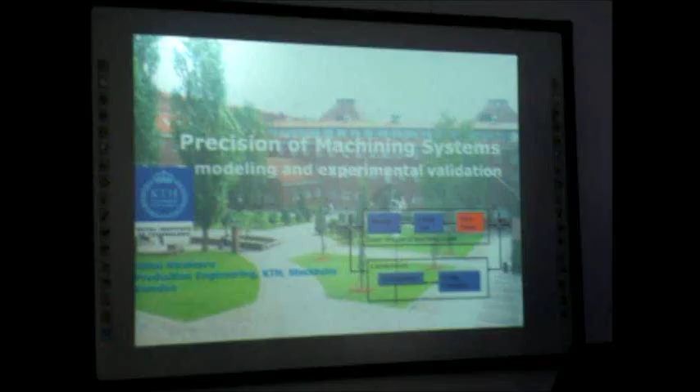Thank you for the invitation, and thank you for being here. I feel more Tunisian now than Swedish. Very nice to be here. Thank you, Samir, for organizing this and keeping me busy, as always.

Last time you said my presentation was more touristic. Now I want to make it more technical. So this is a presentation, not a lecture, on our research in precision machining, and I will present our approach and the concept we developed.

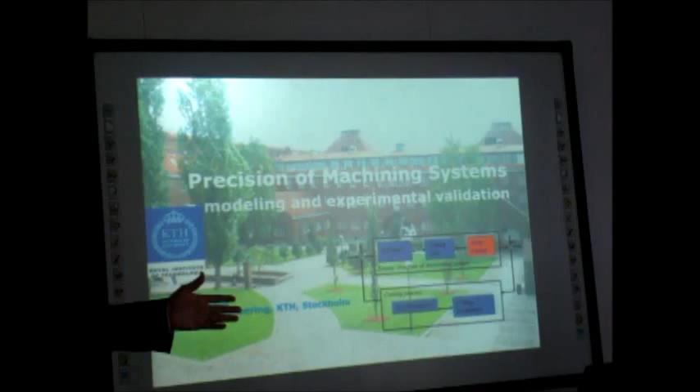So if you read this title, it's about the precision of machining systems. I'll explain what I understand by machining a bit later. The presentation today covers precision capability, elastically linked systems, loaded double ball bar testing of machine tools under loaded conditions, modeling, and finally conclusions about strategies for compensating errors.

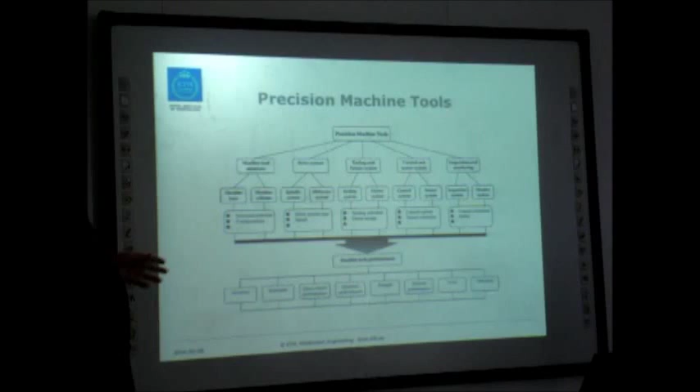First, something everybody is probably familiar with: this type of representation of precision machine tools and their components, elements in the machine tool. There are structural elements and elements connected to the control system, drivers, and so forth. Then we define the performance of a machine tool with respect to performance criteria like kinematics, dynamics, thermal errors, and so forth. This is a quite familiar picture that I think everybody understands.

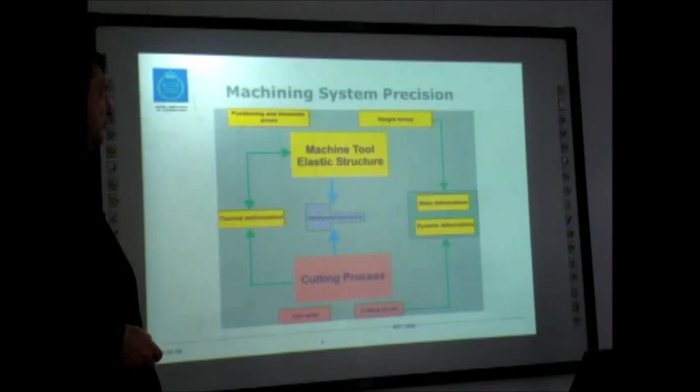The problem here is that this is about the precision machine tool itself, which is more interesting from the manufacturer's point of view. But for users, we are interested in the interaction between the machine tool structure and elements and the machining process. For instance, thermal deformation or thermal deviation can come both from the cutting process and from the machine tool structure, or friction from parts in movement. This is the new aspect that we developed in my group.

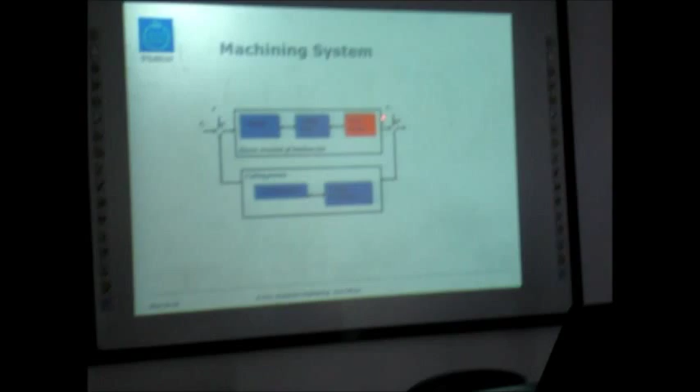So we define a machining system as the interaction between the machine tool structure, the control system, and the cutting process. In this interaction between these two subsystems, we study the precision of the system. As in any mechanical system, the structure is excited by a force, and the output of the structure gets some deviation, static or dynamic vibration, and this is the input to the process. The variation at the output of the machine tool structure generates deviation in cutting conditions, resulting in deviation of cutting force, which can be amplified or damped.

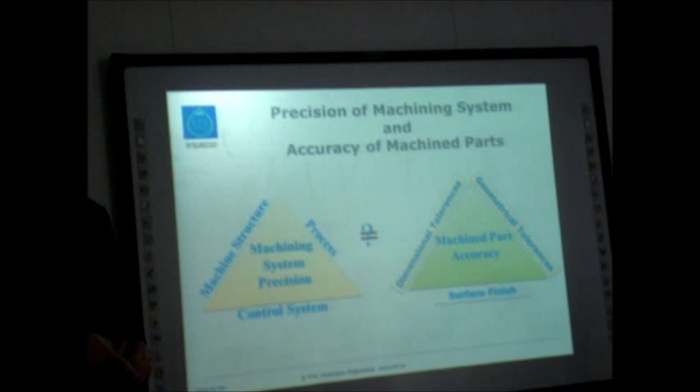Now about the link between precision of machining systems and accuracy: regarding nomenclature, I use the traditional way, so everybody knows there's a difference between precision, which is connected to repeatability, and accuracy. I use the standard definitions. In my opinion, from the point of view of the machine tool or machining system, this precision feature is more important with respect to delivering the same characteristics of the part all the time, while for machined parts, accuracy is better defined from a static point of view.

So in machining system precision, we talk about machine structure and precision of the control system—all of these contribute to system precision. While in machined part accuracy, we have dimensional tolerances, geometrical tolerances, and surface finish. There are, of course, many other parameters that can define a part, but from the point of view of accuracy, we can agree that these are sufficient.

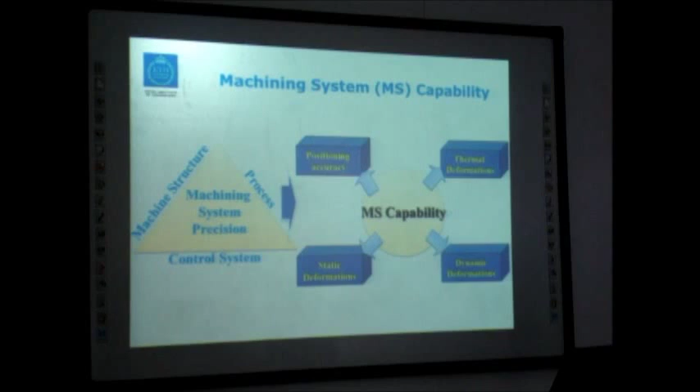Now, machining system is also connected to machining system capability in terms of position, kinematics, accuracy, thermal deformation, dynamic deformation, vibration, and static deformation. These are the main groups of errors or deviations from accuracy that can belong to one group or the other.

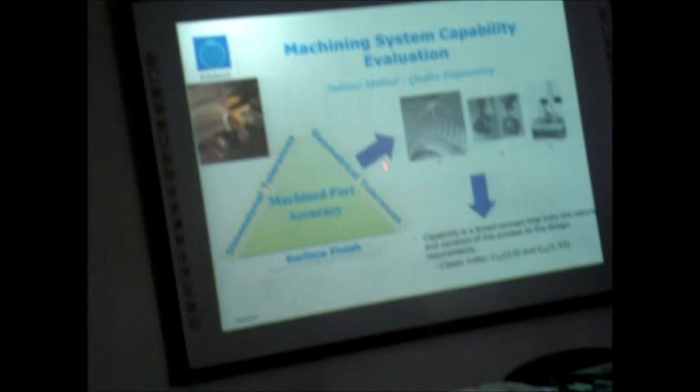There are two methods to define the precision of machining or the machining system. One is an indirect method, belonging to the quality engineering area, where you measure the parts—the output from the system—and from this we define an index, normally called a capability index. So we don't measure anything in the system itself, we measure the output in terms of outcomes. The main limitation, I think, is that this is missing one picture.

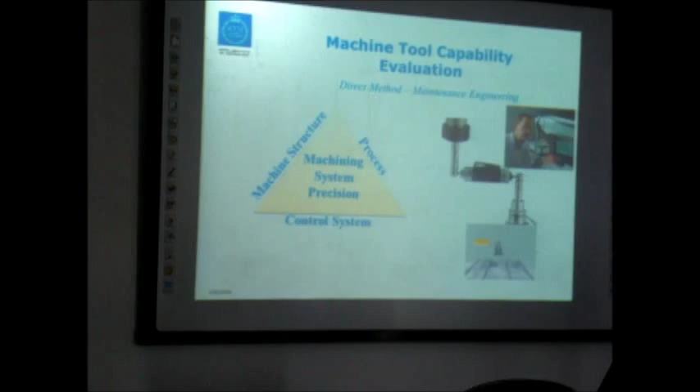Then we go to the direct method, which makes a difference. Here we talk about the machining system because the output depends both on the machine tool and on the process. But current methods for evaluation through direct methods refer only to the machine tool—they look only at the capability of the machine tool outside of the machining process.

And there is some equipment used today for controlling precision. One of these is the double ball bar, and another is the laser interferometer. I can show you the double ball bar in case you don't know what it is—I can do that.

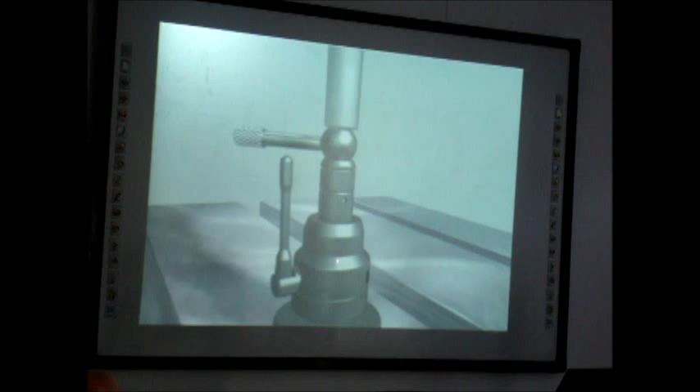So this is a double ball bar instrument. This first part is to calibrate the machine tool table and to calibrate the spindle position, and then you fix the fixture on the table.

So this is calibration. Then you bring this double ball bar - it's called that because it's a bar with two balls. This is a quite normal procedure, and then you execute a rotation. These bars can have different lengths, and you produce a circular trajectory and measure the deviation from a circle.

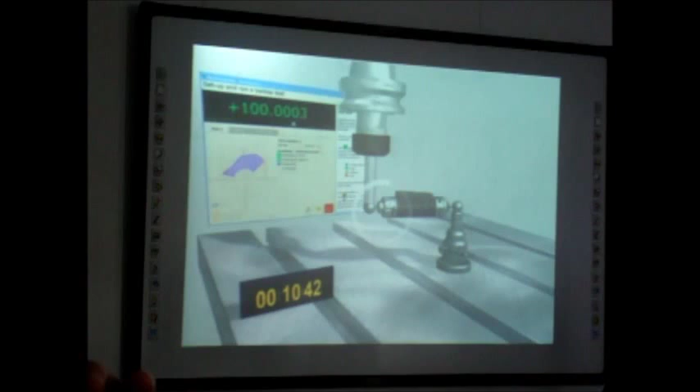And you make a counterclockwise rotation to make a rotation circle. In some machines you have both table and spindle to produce this rotation. In other machines, as in this one, only the spindle - the table is fixed - to produce this type.

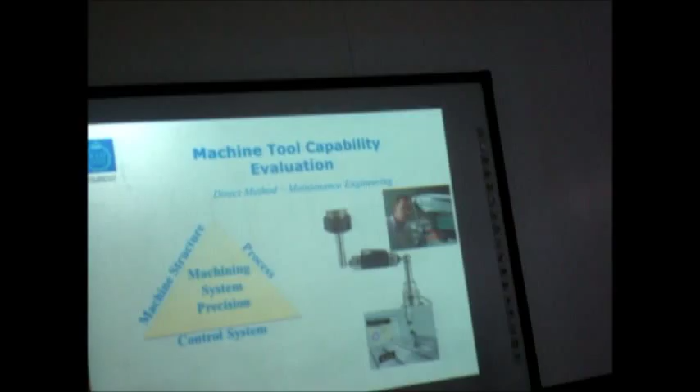Other method which is more accurate is by laser interferometry, so triangulation, but these are not so popular in industry.

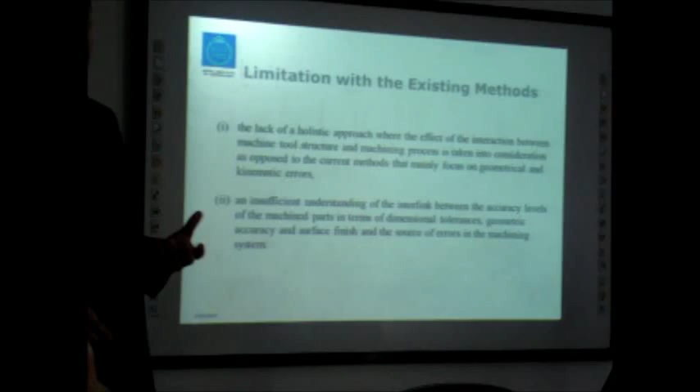Now there are two limitations of these methods. One is the lack of a holistic approach - so the connection between machine tool, machining process, and the measurement system. And the other, the most significant limitation, is that there is no connection between the part that we produce and what is the source of errors.

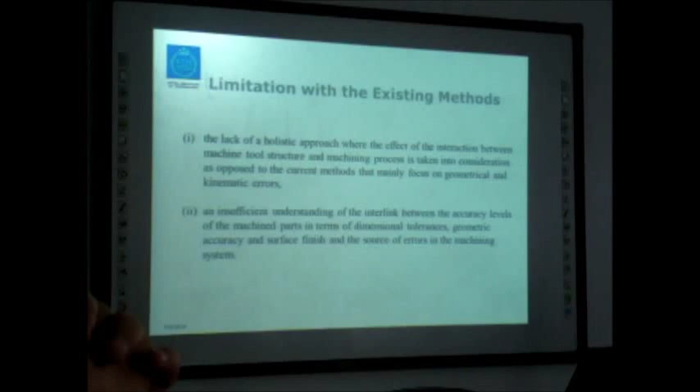So you measure a part with this indirect method. We know that there is some deviation from the design specification, but we don't know what in the machine tool is the source of error. So for this, we have to go in deeper. This deviation can come either from the machine tool or from the process, so it's difficult to discriminate between the two. This is the major limitation.

So therefore, we developed a new method. First, to introduce it, we developed this concept which is called the elastically linked system. Normally, a machine tool in off operation is in a state of open loop - you have an open force from the tool through columns back to the workpiece.

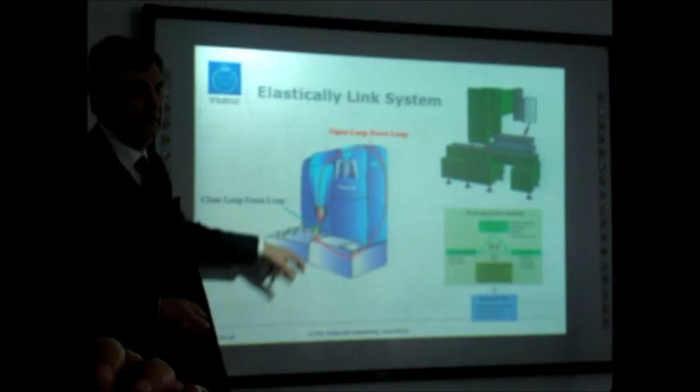Now when we start machining, then we close this loop through the tool. So we have two loops: an open loop and a closed loop. Here is the model that we developed - you have a force loop through the elements of the machine, and another loop that closes this energy loop. This is the concept of the elastically linked system.

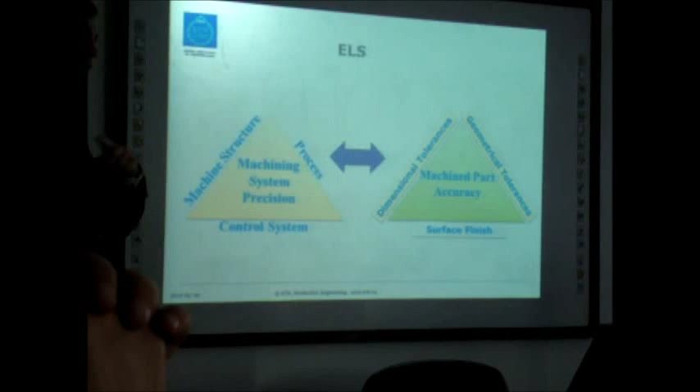What this means is that we can simulate the effect of machining - at least at this stage, static forces and kinematic effects - by changing the load between the spindle and the machine tool table. Based on this concept, we developed the so-called loaded double ball bar. By this concept and method, we can link directly the precision of the system to machined part accuracy. We can now evaluate, from a certain path of the tool in the workspace of the machine, what will be the machining error under the assumption that we consider some forces connected to a cutting parameter.

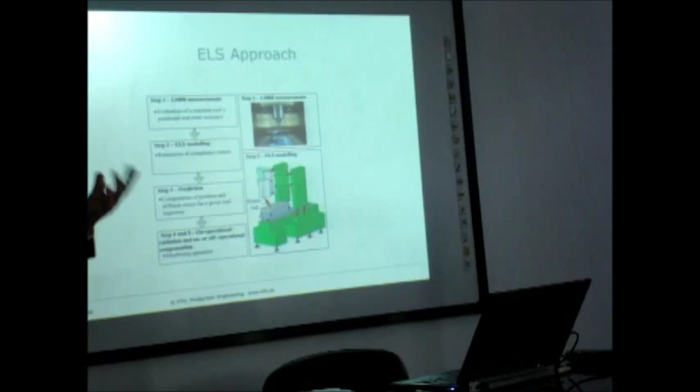So this elastic link approach consists of five steps. The first step is an off-line operation - we are loading the spindle nose and table with different loads. The instrument, which I'll show a bit later, is similar to the double ball bar you have seen before, but we can apply a load. This load can be varied between 0 and approximately 800 to 960 Newton.

So in the first step, we are loading the double ball bar - spindle and table - and we make the same circular trajectory that you have seen before. What we are getting is not the error, but the deformation in the system at that time. So with the double ball bar, we get the error in kinematics and position, but here we get effects both from the deformation in the machining system and from kinematics.

So by connecting this closed loop, we find the deformation in the direction of the loading for different angles.

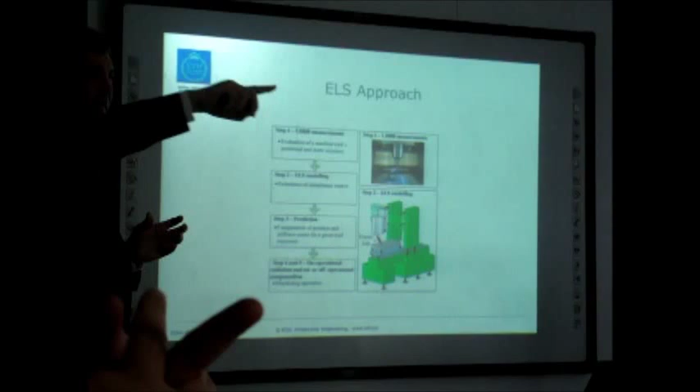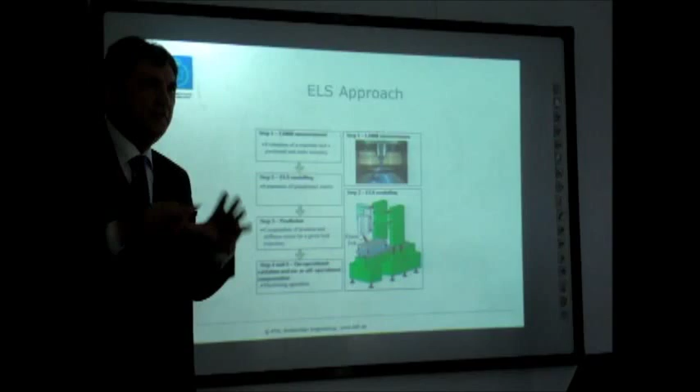If we extract from this some direction of forces and deviation, we can find the deviation with respect to a certain coordinate system. Then we can populate the whole workspace with values of stiffness or deformation. So at any point in space we can calculate the stiffness, know the stiffness, and calculate the deformation and forces at any point. Then, if you have a workpiece of a certain form, we generate a trajectory in this space and find out what are the deviations on the workpiece.

So the first method, this indirect method that is used normally today for modeling, is called bottom-up. This means for finding the distribution of error, we start from each individual connection between two elements in relative motion, which can be rotational or translational. You make a model of how the error between these two components will be, based on a certain coordinate. The method is called the homogeneous matrix method - you probably know it. You make a matrix of all these errors in translation or rotation, and build up the whole machine. This is called bottom-up because overall you get the budgeting of the error, the total error that can be produced.

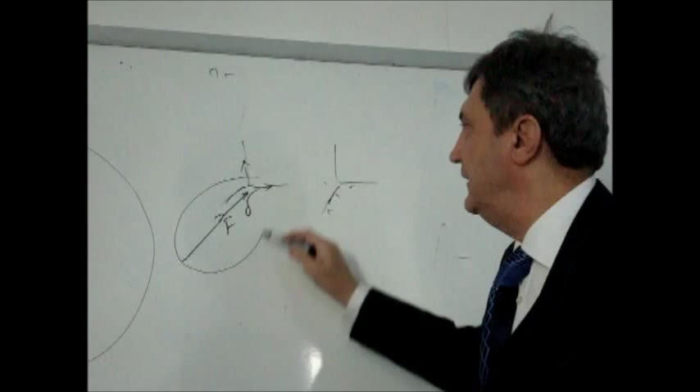But this is a prediction, because it's based on assumption models. What we are doing here is top-down. We know exactly the deviation in the direction of the force. For this, we are projecting into different coordinate systems, and we find the deviation in different axes. So from this, at this point, we know exactly what the deviation is. We will see soon what the limitations are.

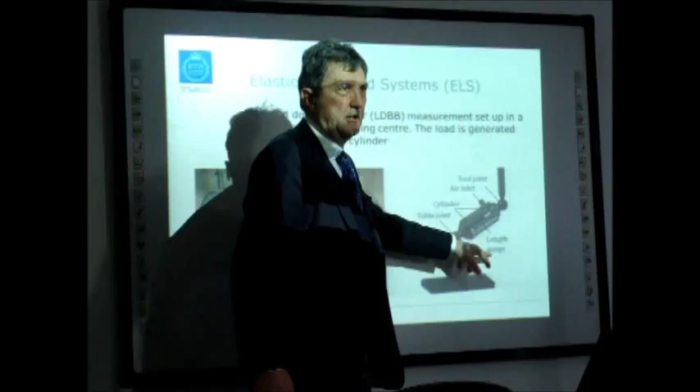So we are using here a multi-body component to calculate and evaluate, at any point in space, the deformation or alternatively the stiffness. So this is the system: a loaded double ball bar, very similar to the conventional double ball bar, but containing an air cylinder. We measure displacement with the length gauge, and we calculate the forces that we apply.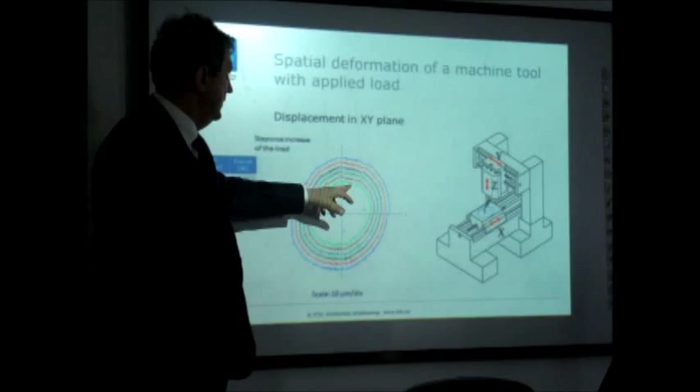So you have a table joint and a tool joint. We load this with different forces, and, just as in the conventional method, we generate some trajectory. It can be in the XY plane or any plane that the machine tool permits. So for different forces we get such trajectories - each curve here represents a deformation. It's not only static deformation, but also includes kinematics and position, because you are making a movement in space. And not only this, we can also calculate from this curve even the nonlinearity in the system.

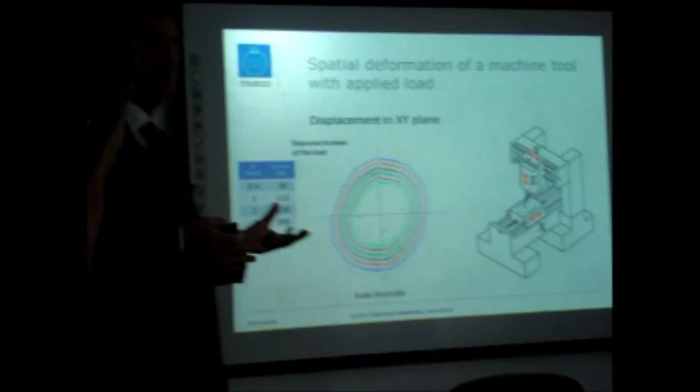This includes both kinematics and static effects - we cannot at this time separate what is coming from static versus kinematics. From the point of view of users, there are two parts in this field: one is the user who is interested in producing an accurate part, the other is maintenance engineering, which wants to find out how to improve this. I can tell you later about the limitations.

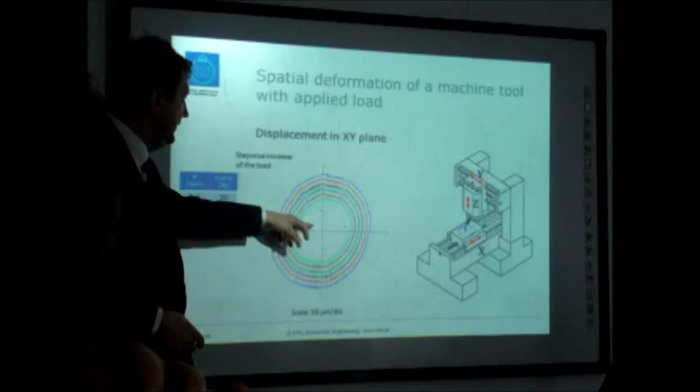So here's the displacement XY plane for different loads, and this is the static stiffness calculated from this curve. We can make this type of experiment in any plane. Now, from this we take a direction, so we know exactly what the force is and what the deformation is.

So if we take the forces in some direction, from the point of view of users, we can now configure - if we know exactly this part - what's interesting for the user is the relative displacement between tool and workpiece. If we know this deviation, we can model the spindle with, for instance, 6 degrees of freedom. We can calculate from this system, we can calculate this one. So we don't need more in order to calculate the deviation here.

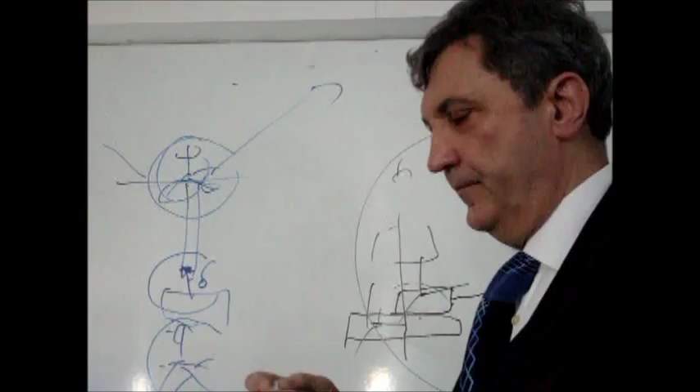But from the point of view of maintenance, we want to distribute this error further in the system. So we developed also a kinematic model for this. We can calculate - here is the direction of this double ball bar, the force and corresponding deviation. Now we can calculate by extracting the forces in different planes. We can also distribute the error to the joints, for instance columns, and go further depending on the system.

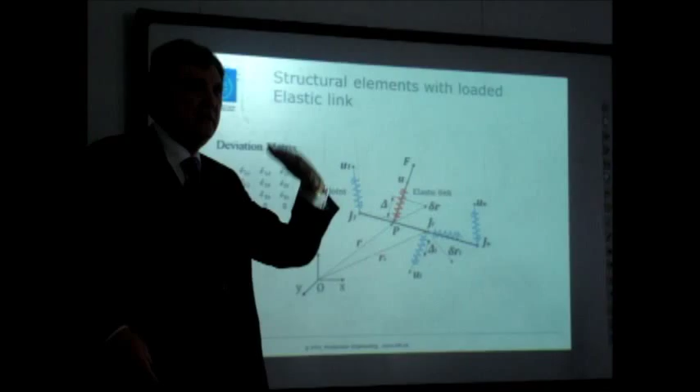The disadvantage of top-down is that we know exactly what happened, but we have to use variational calculus or similar to distribute the error. So the longer we go in the system, the larger the error. But from the user's point of view, it's enough to know this deviation to make a trajectory in the model and calculate resulting forces. So we calculate such a deviation matrix for all these joints, and the better the model, the better our prediction.

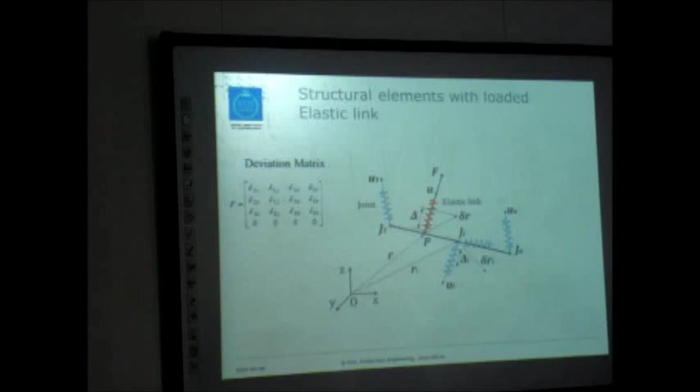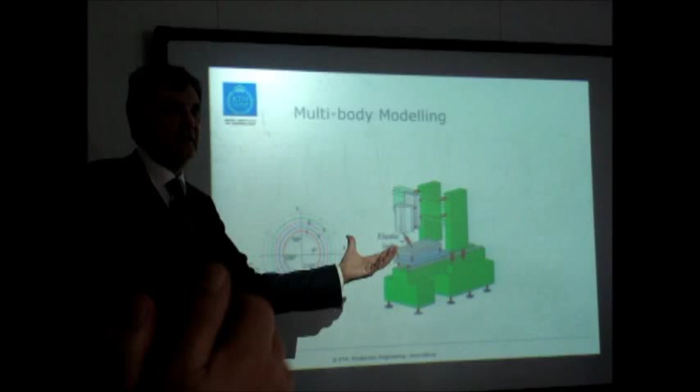So this is the predicted result in a certain plane. For instance, we want to make a circular trajectory, and this is the result for calculation of different forces. So this will be the error or deviation on the workpiece. Now we can link directly the machining system precision with this deviation that we are predicting on the workpiece.

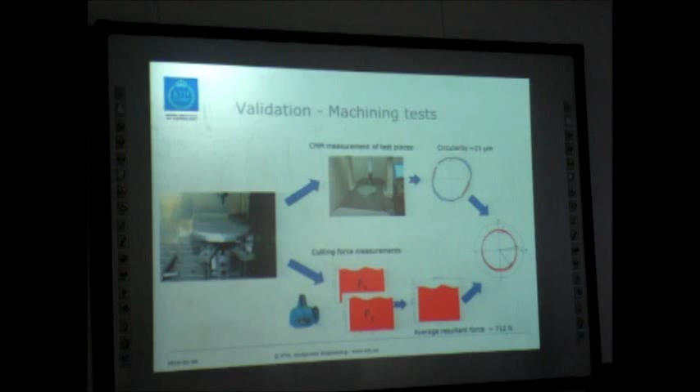So to validate this method, we make some measurements. We place this LDBB in 7 positions, and we make a circular trajectory, and we calculate the corresponding deviation. Then we use a coordinate measuring machine to measure this deviation and compare to the result that we had. So this was the circular piece that we machined. We measured the accuracy with a coordinate machine, and we compare it to the one produced in the model.

And we found the force error in calculation force is under 10%. Now this must also be considered with caution, because the force measurement itself has a quite big error range. So normally with existing commercial systems like the one we are using, you cannot measure repeatedly with accuracy better than 15%. So this 10% must be understood in the right frame.

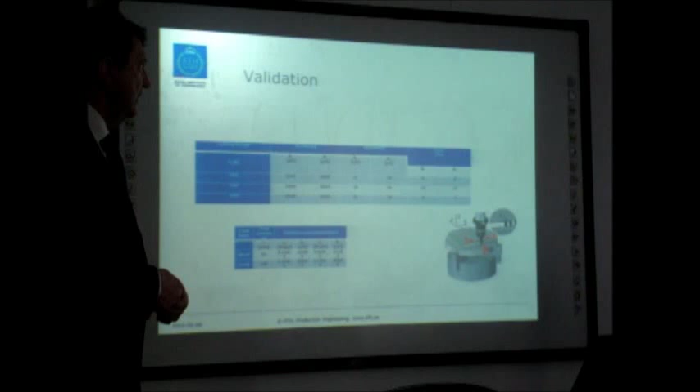But anyhow, the accuracy that we measure, comparing with what we get from the model, the error is very small, so this is also under 10%. So the next step is that we compare these two, model and experiment, and we make a correction in the algorithm and in the model.

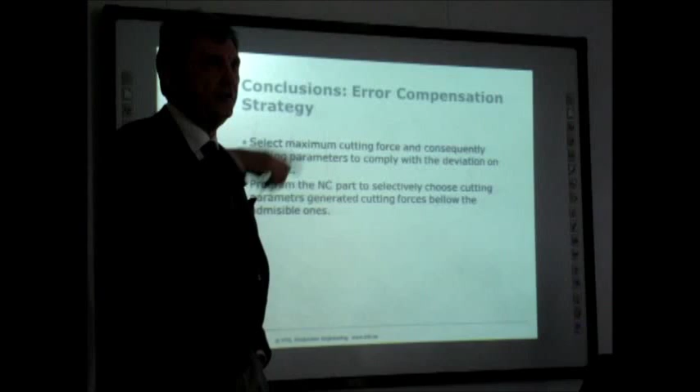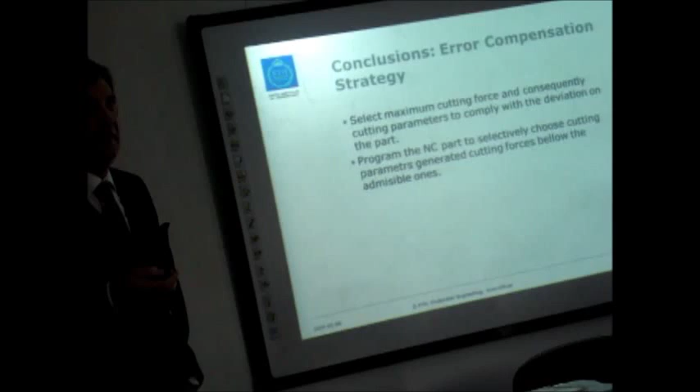Now there are two direct applications of this concept. So now we know exactly the forces, we know force, we know cutting parameters, we know exactly what will be the deviation on the workpiece. Based on this, we can compensate for errors either by reducing the cutting force under the minimum force producing this deviation, or by making a more dynamic strategy by changing the program. So you can change the NC program part, we can change the forces and corresponding cutting parameters that correspond to this deviation that we want to compensate.

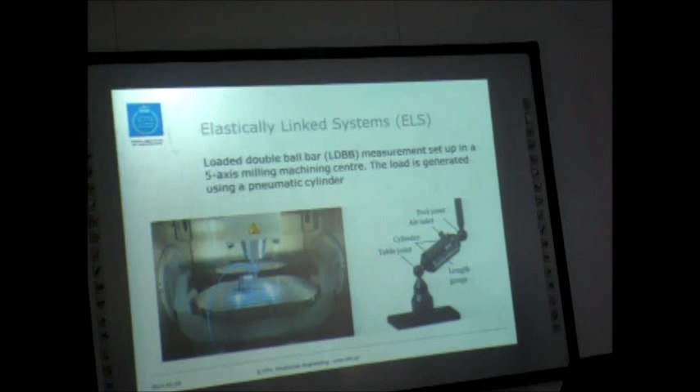We are working in this program. Initially the project was performed together with Scania, but then this device was produced by a company called C.E. Johansson. Probably you know, because it's one of the older companies that developed a lot of instruments. This company was bought by a Swedish company called Hexagon. So now this project is financed by Hexagon, so the next step is to develop...

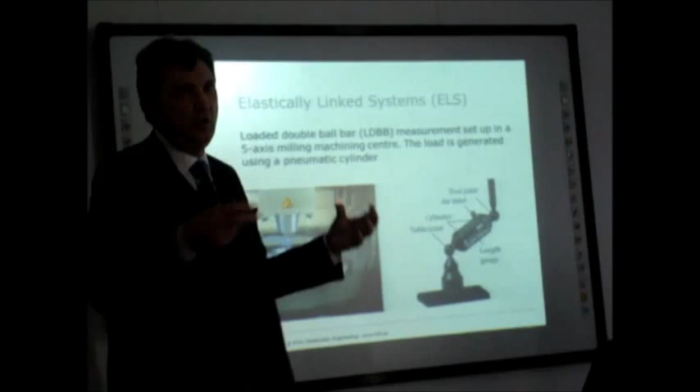What I didn't mention, is that the ball bar is fixed between spindle nose and table. But the most effects, at least from a static point of view, come from the tool and from the workpiece, if you have a quite flexible workpiece. So what we are doing in the model, we are adding to this finite element based multi-body model the tool and the workpiece.

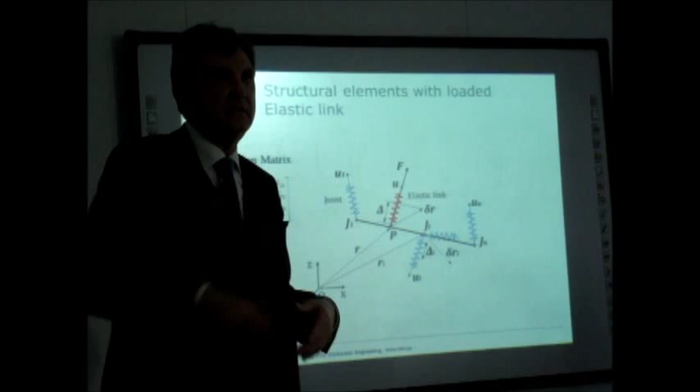So these are included, and also from our experiments we find out that most error comes not from kinematics or position, but comes from tool deformation, or alternatively from the workpiece, also vibrational effects. So as soon as, for instance, you increase the tool length, you start getting vibration, giving deviation much larger than we can get otherwise.

We also saw a quite large effect coming even from tool wear. So it's important to separate these effects coming from the workpiece, from the process, and from the machine. So right now we can link directly the machining system to the outcomes, to the machine part.

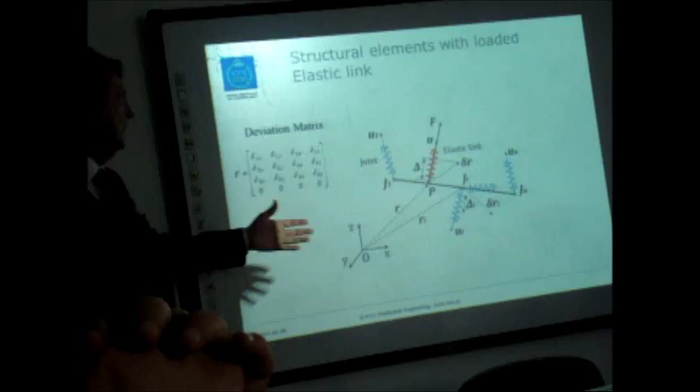Remains to see further if we can better predict the deformation of different components, because here it's still statically difficult to express a deviation in movable parts. So in guides, the most error comes from movable parts, from spindle or from the guide, stable screw drives and guides.

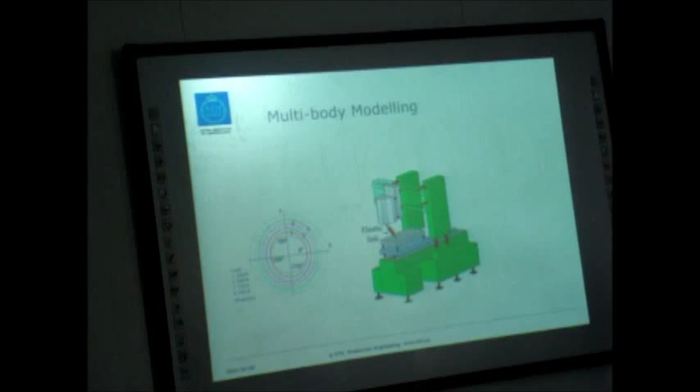I think that is... Does it have to be horizontal, or does the orientation not matter? Now, this is also...

There is a problem when you have a load, because if you want to keep constant, what you want to keep constant is the force in the loaded double ball bar, or the force in the component. If you have a force which is vertical, you have no component here. So the system has a compensation that takes this into account. In fact, you are interested in the projection in the direction, not what we have in the system. So it's compensating, because you have a deformation even in these joints, both in the table and the spindle.

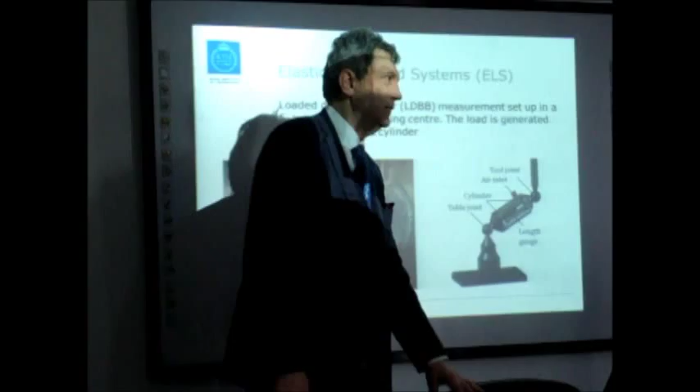What I am now preparing, because the most important part is the stiffness, and deformation and kinematic error also vary with respect to the speed, so now I am preparing a system that permits to rotate the... In fact, also for...

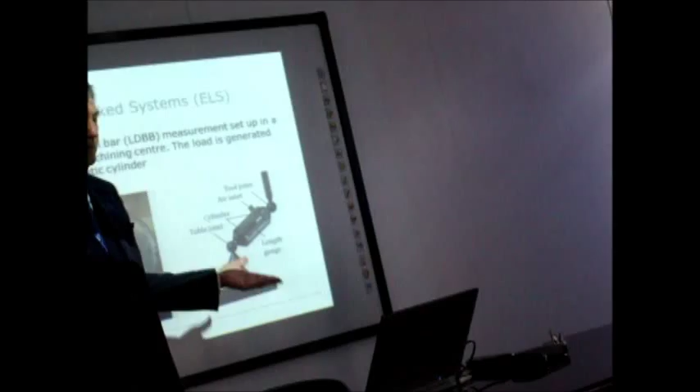And how do you know the horizontal angle, vertical? Unfortunately I don't have a video or record that shows how this rotates, but as with this conventional double ball bar, you can rotate this plane, as the machine tool permits. So if you have a 5-axis machine tool, you can basically do any plane.

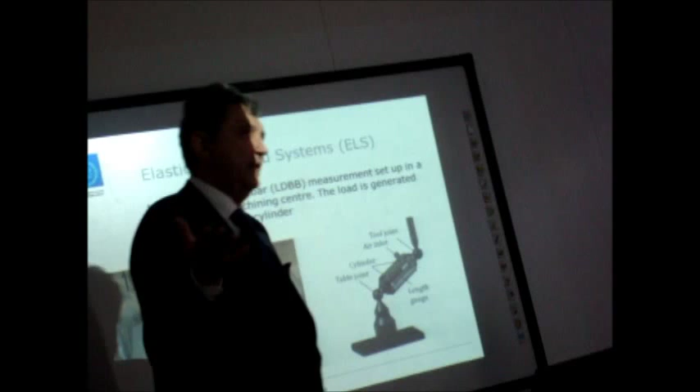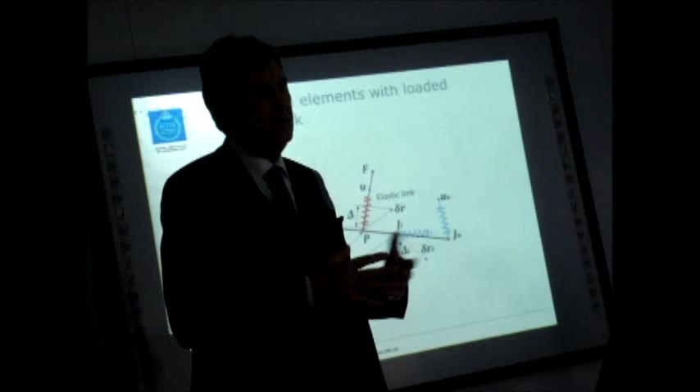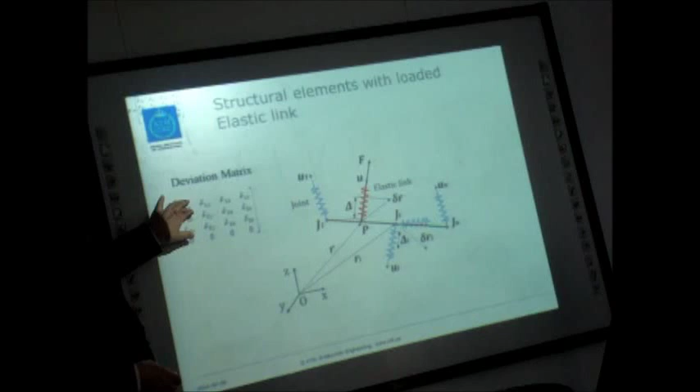So this joint mount, we can now change both the damping, for dynamics and for static kinematics. But again, the problem is that this matrix component includes both kinematic and static parts, and we don't know how much is one and how much is the other. So the other approach we are doing here is changing only the static part, not the kinematic one.

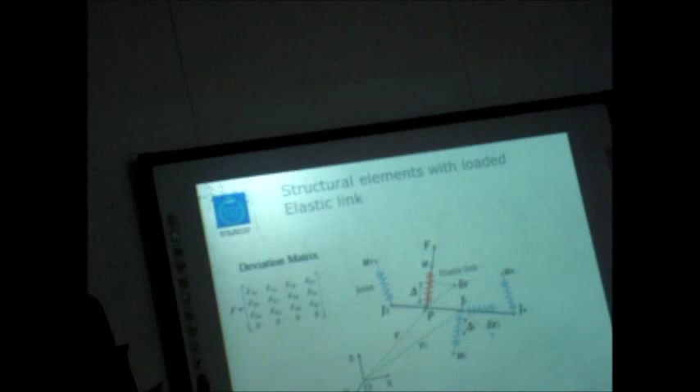So now the question is, what is meant by optimization? What are the performance criteria? Is the optimization about increasing productivity, reducing cost, improving quality? The problem is that in education we teach our students in production how to go faster, high volumes, but in times of crisis, optimization is to adapt the production to the amount of work that we have.

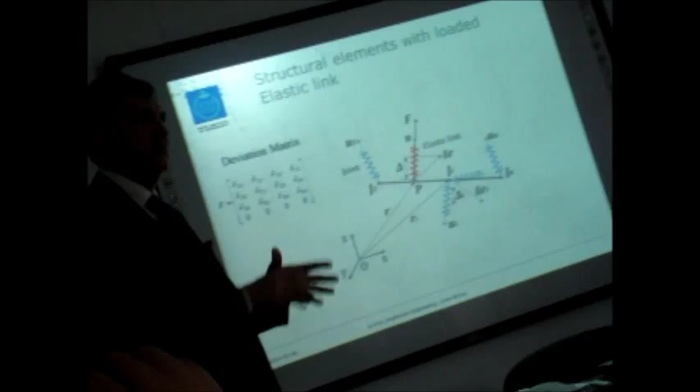So if you look at the parameters we can optimize, we optimize with respect to the cutting tool and machine. Mostly speed is important, so it's for tool life, and this doesn't too much influence directly the deviation because it's not affecting the force, but it affects wear. So this is the part - but regarding a new tool, it's not affecting it directly. So this is the main parameter that affects optimization. But with respect to optimization for productivity, it can be compensated in some way, for instance decreasing depth of cut, or increasing feed rates.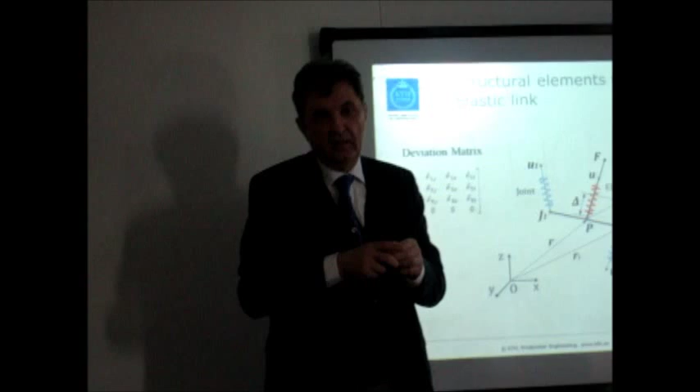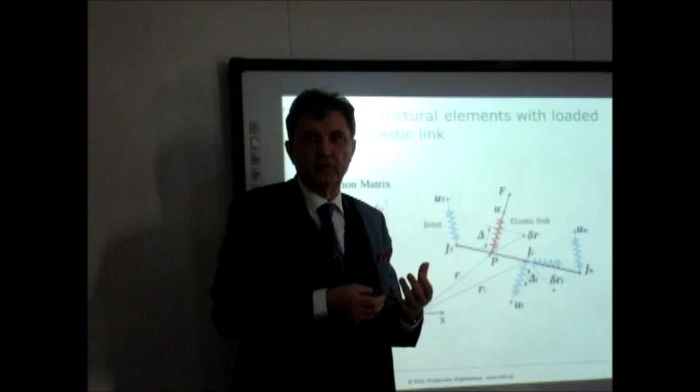Yeah, I think so. But theoretically, at least we can see now in which direction the forces are max, or the stiffness is minimum, to adapt the direction of forces. The problem is that it's very difficult, at least at a practical level, to have an idea how force direction will change during a complex form. But anyhow, we can generate any trajectory accordingly, but as I say, we cannot say that we are now mastering the precision as long as we don't have an idea how to distribute the errors downward.

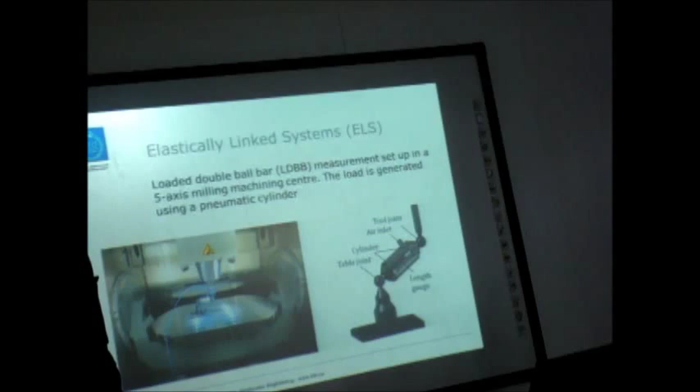It depends also on the level of precision we discuss here. So for us, precision is a feature that today is not related to the scale of the part. It can be very small or very large. The precision today should be the same because, for instance in aerospace, you have a long wing, you have to produce the same precision because you have to reduce the weight, you have to reduce the thickness.

So the precision should be the same as for instance, medical implants. So there should not be differences.

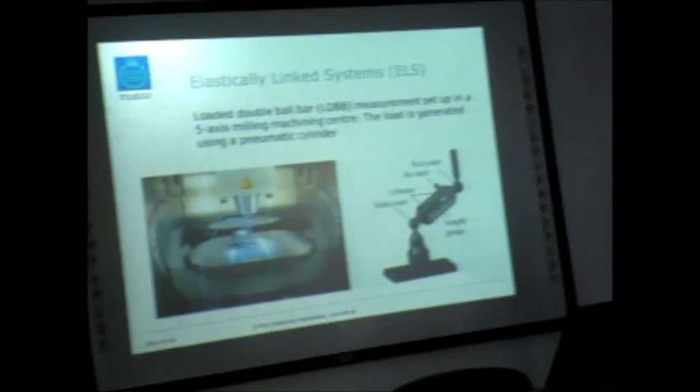So we applied this system also in Sweden, in Saab aerospace, for measuring on their machine with a traverse of 40 meters for composite machining, so applied there. But also for accurate machines, for instance, from Switzerland, Mikron, which are working in high precision.

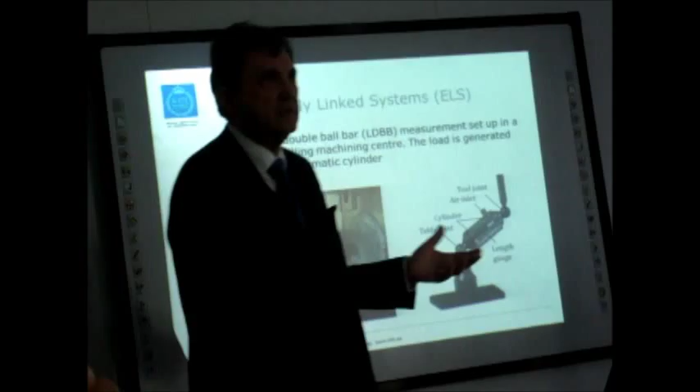So we measure with this system, for instance, in Volvo Aero. So this was the first result that confirmed the practical feelings of the operator. So we measured in Volvo Aero 5 identical machines.

Such a 5-axis machine, and we have found differences up to 60% between them. And it was exactly what the operator had the feeling for. They said that yes, we feel that this machine is not as good as the other. So we could also confirm this.

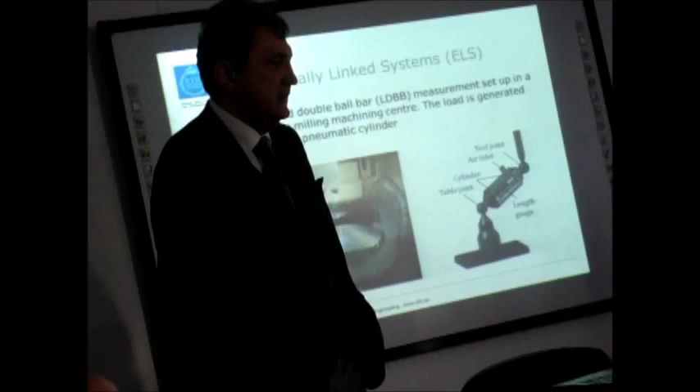So the system is efficient also for comparing different machine tools. Because this is the most important part for the user to know, for some critical operation, what will be the errors. So some operations like drilling or milling with large face mills are very critical for the error. So this is a system that, but of course there is more to develop also from a dynamic point of view and also looking at high speed. So it's not a perfect system.

But it's much more efficient than a double ball bar. So for us it was important, this concept of elastically linked. Now we can develop other devices to make this link between the machining system and the part.

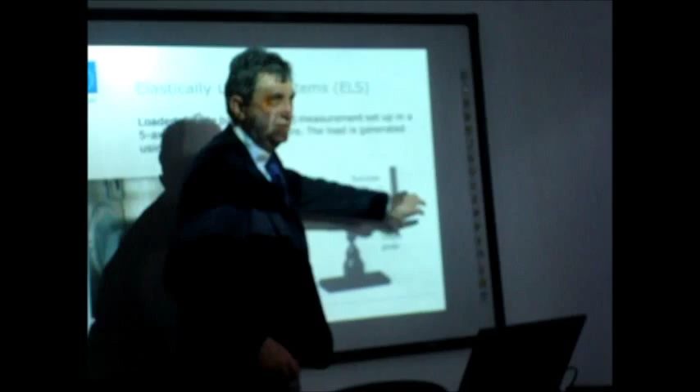So we made some, as the problem is that you have two systems here. One is critical, the spindle, the other is the guides. And we don't have an absolute system, so if we could fix this to an absolute reference system to test only this, we can then, but the problem is that they are affected both through the open loop and closed loop.

So it's difficult, if we could separate, to have here some reference system that tests only this, or a reference system here too, but they are connecting to each other through the open loop all the time. So it's difficult to distribute these parts.

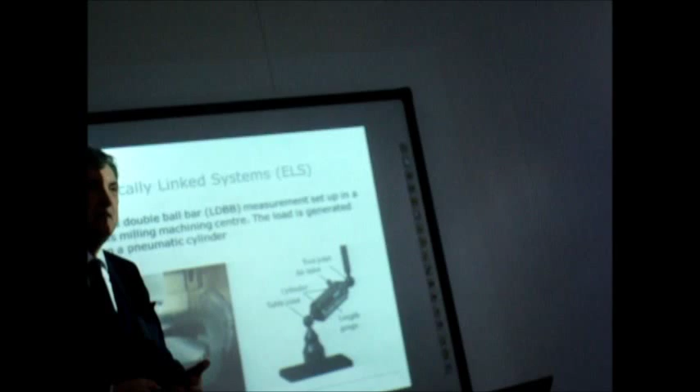So for many companies, they are interested. This was also thought of as a system to test new machines before buying them. Also Scania in Stockholm, they are buying every year for 50 million crowns new machine tools, and they say that 70% of machine tools are not complying with ISO or even with the company's own regulations. So it's a serious problem.

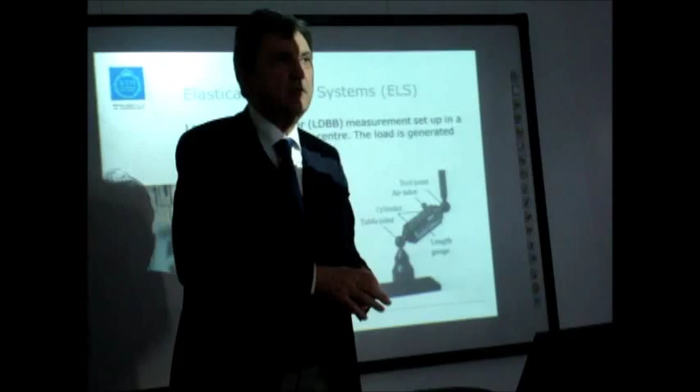So many problems come not from the spindle but from the guideways. So this was also thought of as a method to say, okay, this is not only to say this guideway is good or not, but also to predict if in 1 month or 2 months or 1 year you'll be out of service. But as long as we cannot, we are looking now for methods to separate these two parts.